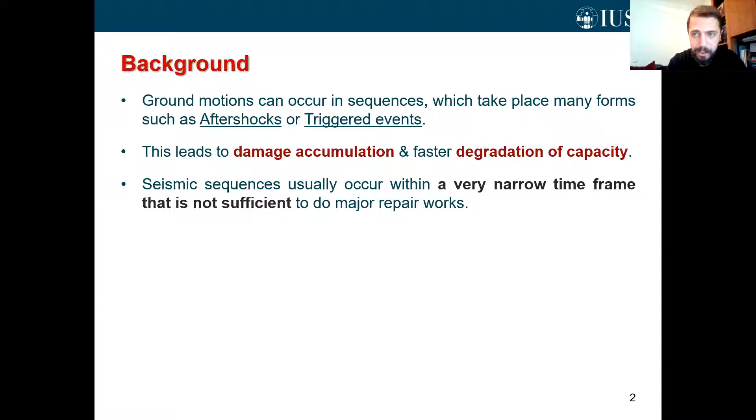On top of that, seismic sequences usually occur within a very narrow time frame that is not sufficient to do major repair works in case you have a damaged building population. This unfortunately can lead to catastrophic consequences, as demonstrated by many past events.

In general, the effects of ground motion sequences on buildings have attracted a lot of research effort in the past decades, but studies available in the literature pertaining to the assessment of fragility and particularly vulnerability using refined nonlinear models are still very few.

In this study, we try to fill this research gap by investigating the effects of ground motion sequences on the performance of case study reinforced concrete frames.

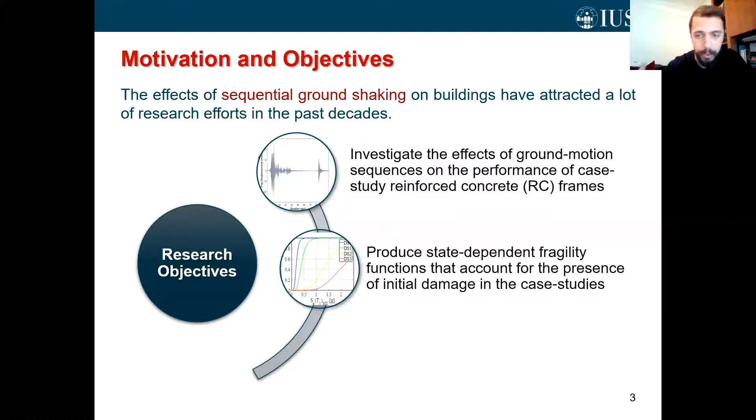We also try to produce what we call state-dependent fragility functions that account for the presence of initial damage in our case study frames. Finally, we endeavor to develop vulnerability functions both in 2D and 3D forms that can be easily adopted in seismic risk assessment and quantification of direct seismic losses applications.

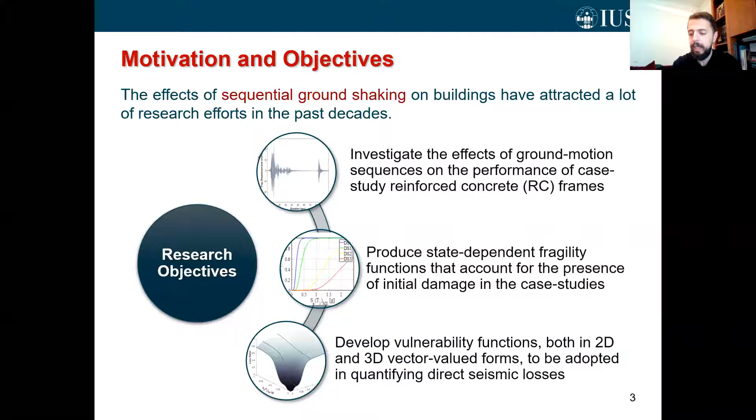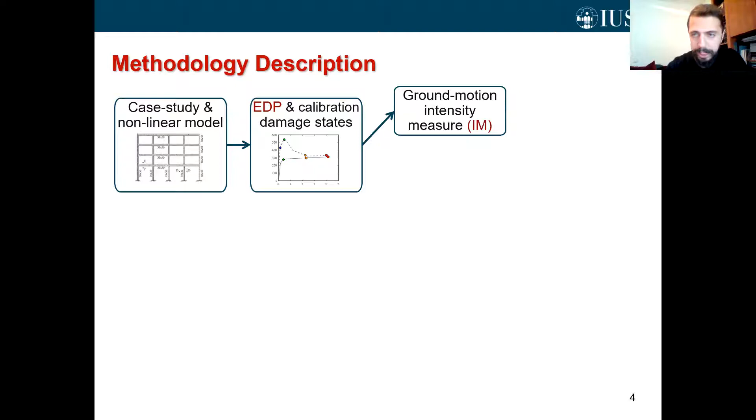The methodological framework we followed starts by identifying the case study buildings and developing the relevant nonlinear models. After that, we select an appropriate engineering demand parameter to quantify the damage, and we calibrate what we call the damage states. Next, we select an appropriate measure for ground shaking intensity, and we define the ground motion sequences, because after that we perform nonlinear time history analysis.

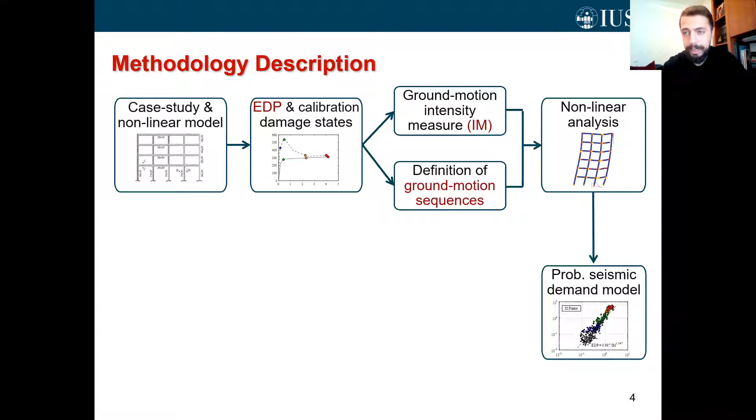Then we use the analysis results to fit a probabilistic seismic demand model that can be used later to derive the state-dependent fragility curves. After that, we can go from the fragility curves to what we call vulnerability functions, which can be expressed in the form of 2D curves or even 3D surfaces, as will be explained at the end of this presentation.

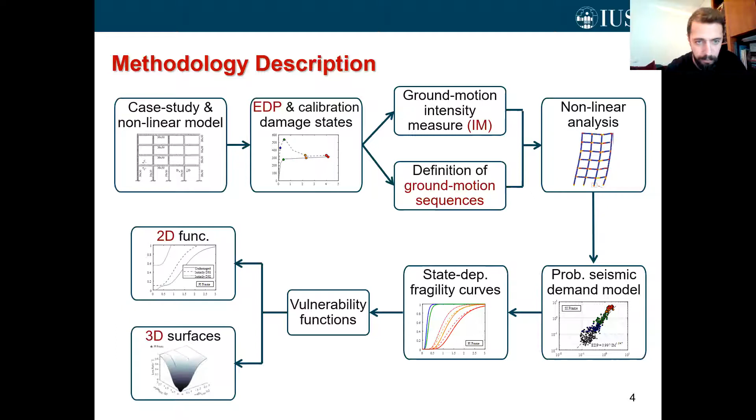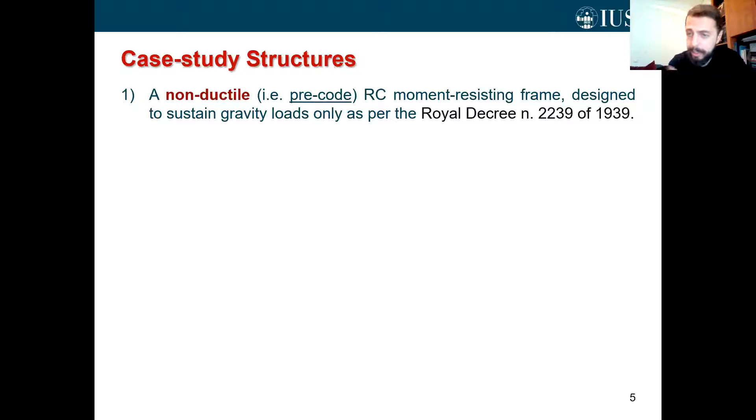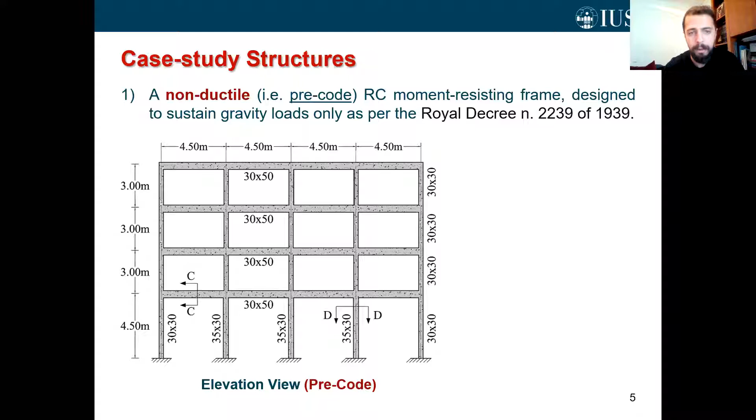Let's start by defining the case study buildings. First, we considered a non-ductile pre-code moment-resisting frame made of reinforced concrete, designed only to sustain gravity loads in accordance with the Royal Decree in Italy of 1939. Here you can see an elevation view of the frame, which consists of 4 floors and has a uniform bay length of 4.5 meters. Here you can see a cross-section for the beam and another cross-section for the column.

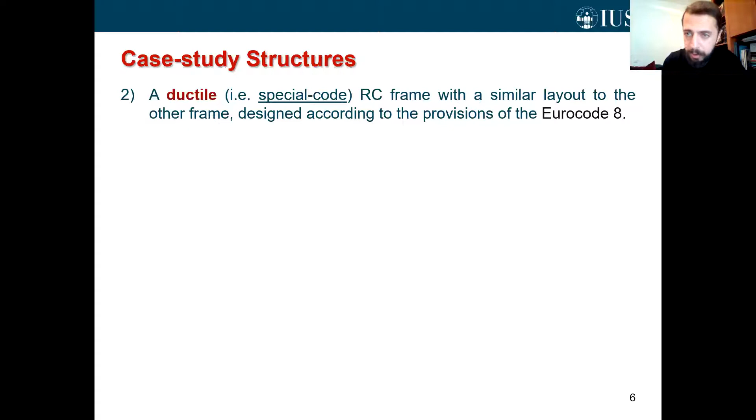Next, we considered a ductile special code moment-resisting frame that has a similar geometrical layout to the previous frame, but this time it has been designed according to the seismic provisions of Eurocode 8 for buildings with high ductility class. Here you can see an elevation view of the frame, together with a beam cross-section and a column cross-section.

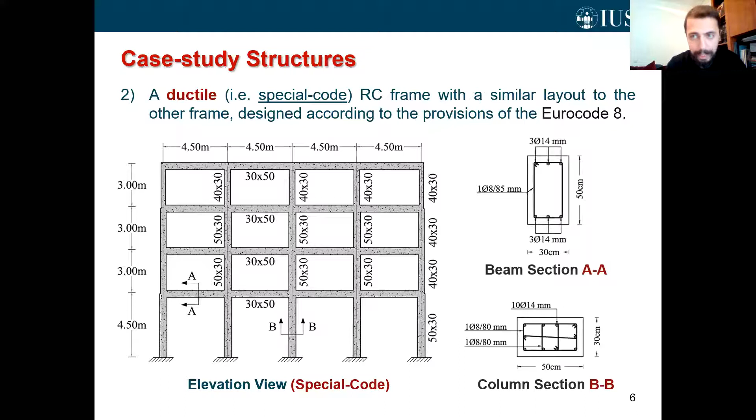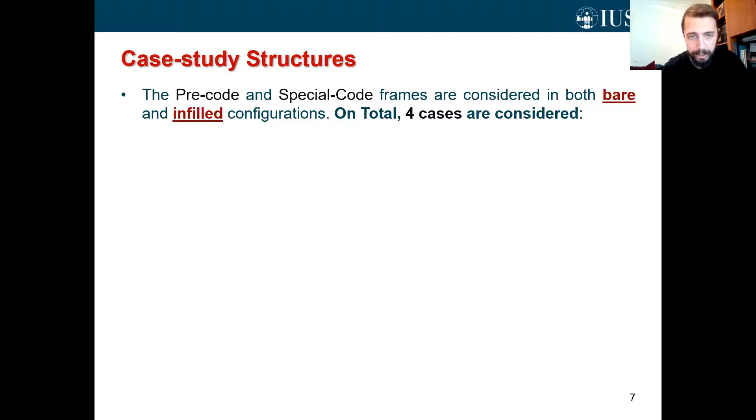I would like to add that we considered both the pre-code frame and the special code frame in both bare and infill configurations, which means that in total we have 4 different case studies: the special code bare frame, the special code infill frame, the pre-code bare frame, and finally the pre-code infilled frame.

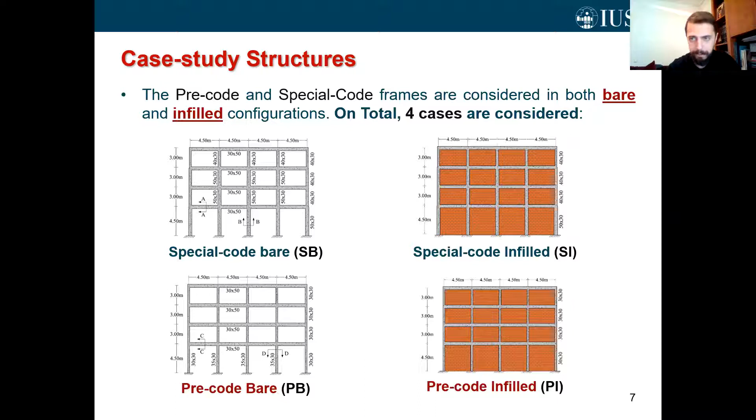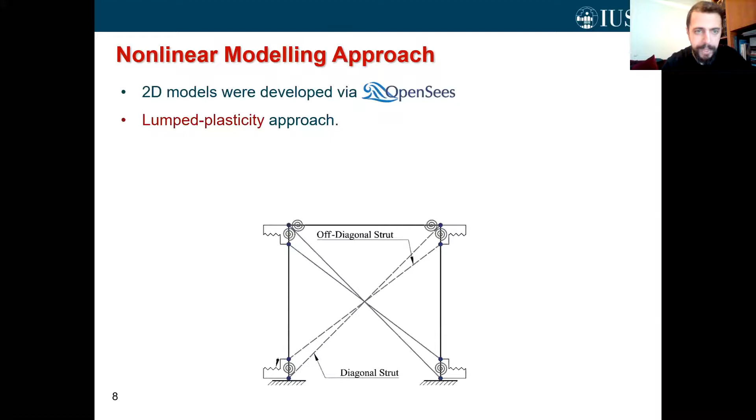Regarding the nonlinear modeling approach, we developed 2D nonlinear models using OpenSees software, and we also implemented the lumped plasticity approach, as you can see in the figure below. In order to account for the different modes of failure and different nonlinearities, we decided to model flexural and shear springs placed together in series, as shown on the right-hand side of the figure. We also accounted for the presence of infills using the concept of equivalent struts, shown on the left-hand side of the figure.

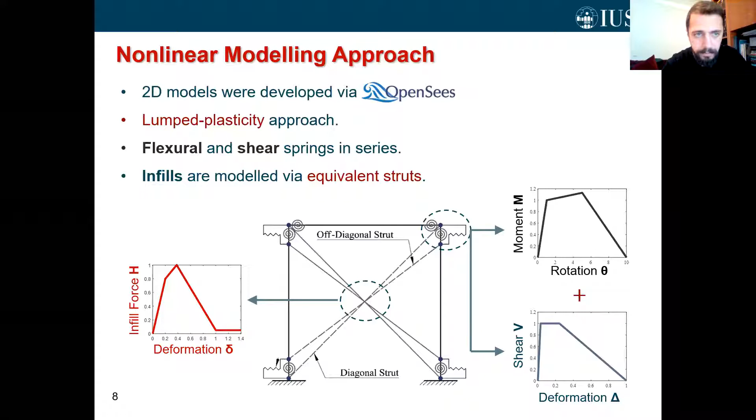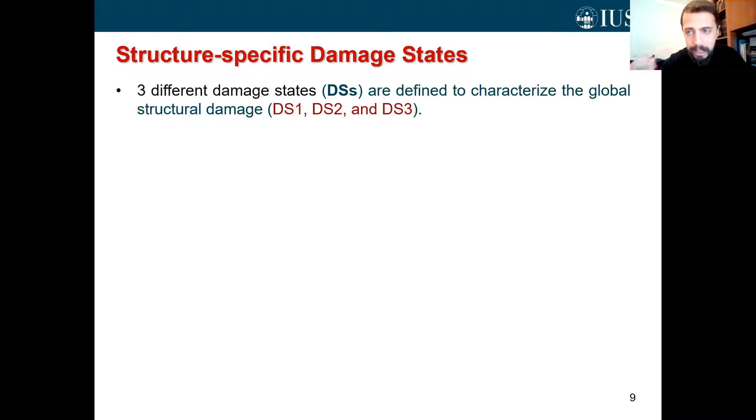In order to quantify the different damage levels that my structure can experience during an earthquake, we defined 3 different levels of damage, called damage states. The first is damage state 1, representing slight damage; damage state 2, representing extensive damage; and damage state 3, representing the near collapse state, which is the most severe one.

After that, to numerically quantify this damage, we decided to use the maximum interstory drift ratio as the main engineering demand parameter, because it has been proven to be highly correlated with structural and non-structural damage. Based on that, the next step is calibrating the maximum interstory drift ratio thresholds corresponding to the occurrence of each damage state.

Without going into too much detail, this can simply be done by running pushover analysis and then performing local assessment of multiple measurable criteria in order to spot the exact occurrence of each damage state in terms of drift thresholds. On the left-hand side, you can see the special code frames with their pushover curves together with the damage state thresholds, and on the right side, the same parameters for the pre-code frames.

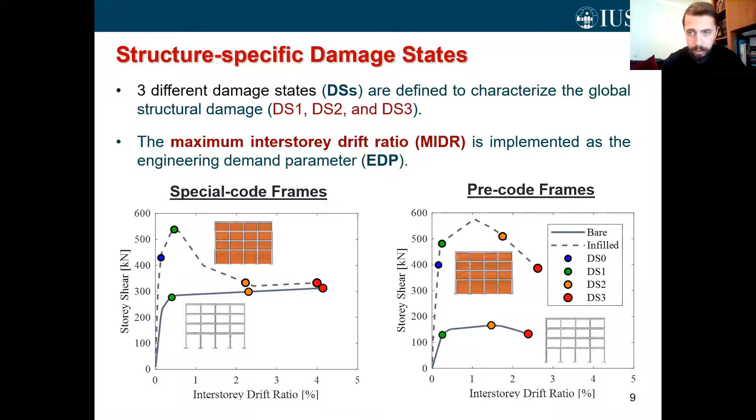Let's talk now about the selection of ground motion sequences. First of all, I'd like to highlight that we selected the average spectral acceleration as a measure for the intensity level of ground shaking for all the ground motions that we have.

Regarding the sequences approach, we implemented what we call artificial ground motion sequences. According to this concept, the main shock records are used as both main shocks and aftershocks. In order to minimize the bias associated with this approach, it's always preferable to select the main shocks randomly in order to be seeded as aftershocks.

I know many people might argue that using real sequences, consisting of real main shocks and real aftershocks, might be better to assess the response. But the main problem is that aftershocks with high levels of intensity are quite scarce, which means there might be problems in terms of statistical stability of the fragility curves. Therefore, for our research, it's always preferable to implement artificial sequences in order to assess the response and derive fragility functions.

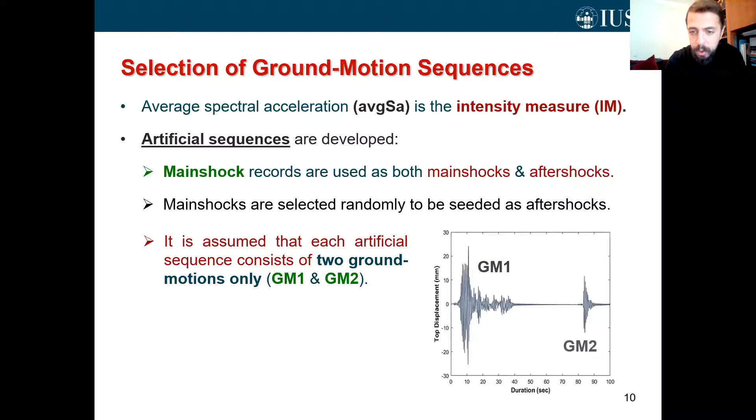In any case, we assume each artificial sequence consists of 2 ground motions. The first is called GM1, and the second is called GM2, as you can see in this figure.

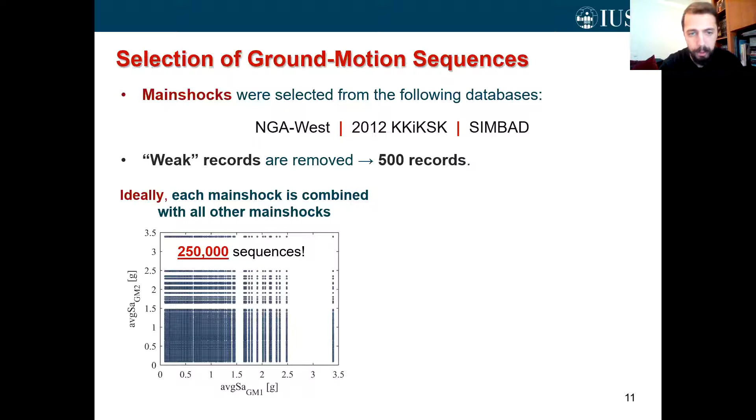In the ideal case scenario, if I'm interested in forming artificial sequences, I'm supposed to combine each main shock record with all the rest of the main shocks, as shown in this figure. On the x-axis, you see the intensity level of ground motion 1, and on the y-axis, the intensity level of ground motion 2 for each sequence. But if I implemented this ideal scenario, I would end up having 250,000 ground motion sequences, which is computationally expensive.

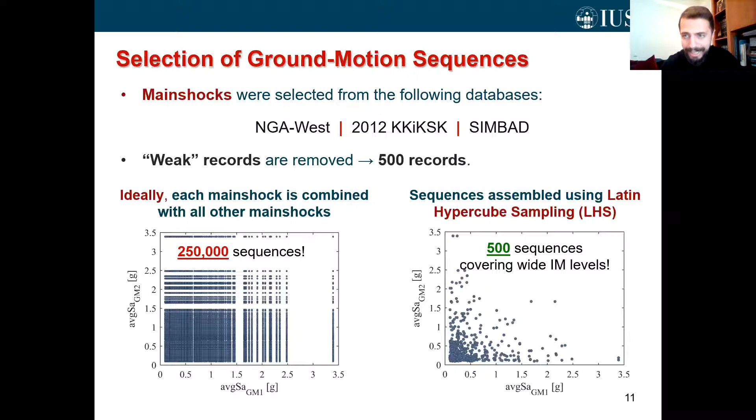And therefore, in order to reduce the number of selected sequences in an unbiased way, we decided to randomly assemble those sequences using the Latin hypercube sampling approach. We ended up having only 500 ground motion sequences that, as you can see, cover a wide range of intensity levels, and of course will require much less computational effort.

Let's begin now the discussion about the analysis. Our analysis is divided into two stages. Stage one has to do with the buildings in the undamaged state, so they are initially as-built without any initial damage. In that stage, the models are subjected to ground motion one only, in order to assess their performance in the undamaged conditions.

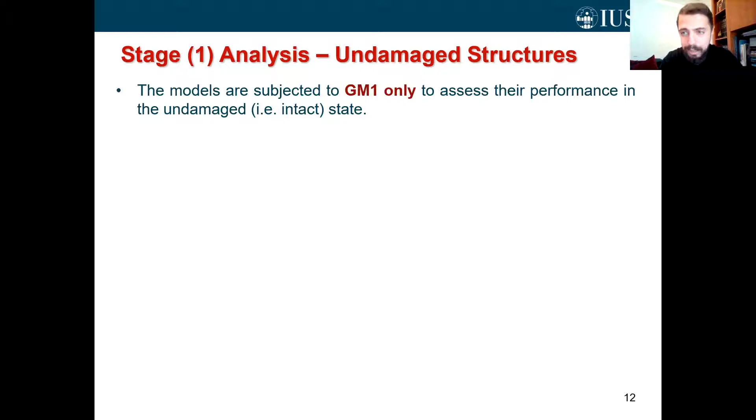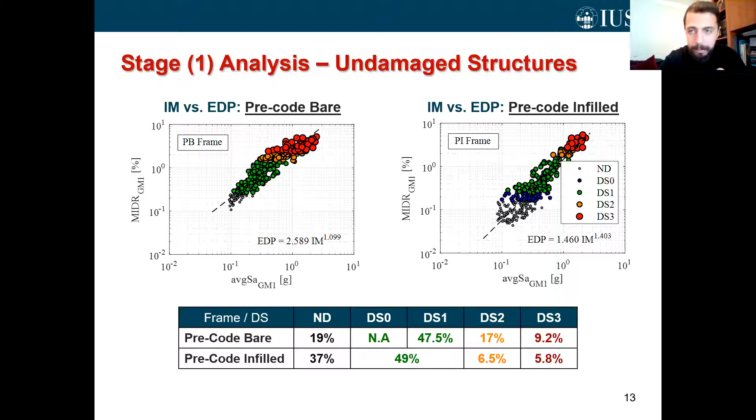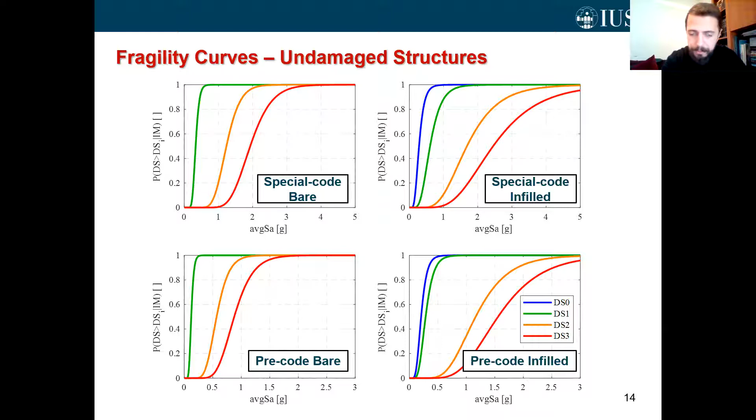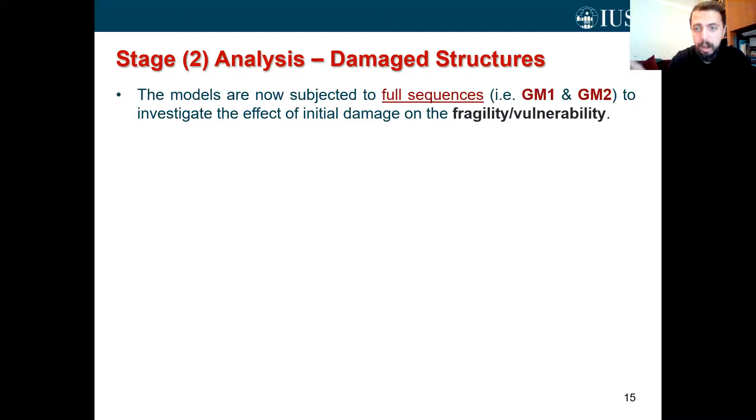Let's move now to the most important stage, stage number 2, which has to do with the damaged buildings. In that stage, the models will be subjected to the full sequences that include both ground motion 1 and ground motion 2, in order to investigate the effect of the initial damage caused by ground motion 1 on the vulnerability and fragility of the case study frames.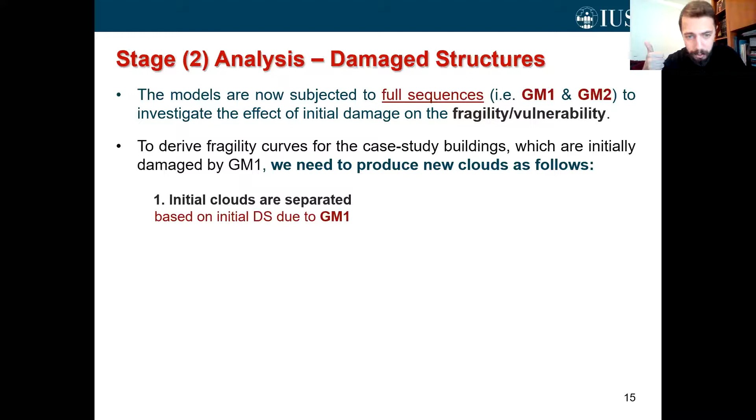Now, to be able to derive the fragility curves for the case study buildings which are initially damaged by ground motion 1, we have to produce new clouds as per the following steps. First, we have to separate the clouds resulting from stage 1 analysis based on the initial damage state caused by ground motion 1. Let's say I have this cloud resulting from stage 1 of the analysis, and this is from the SB frame.

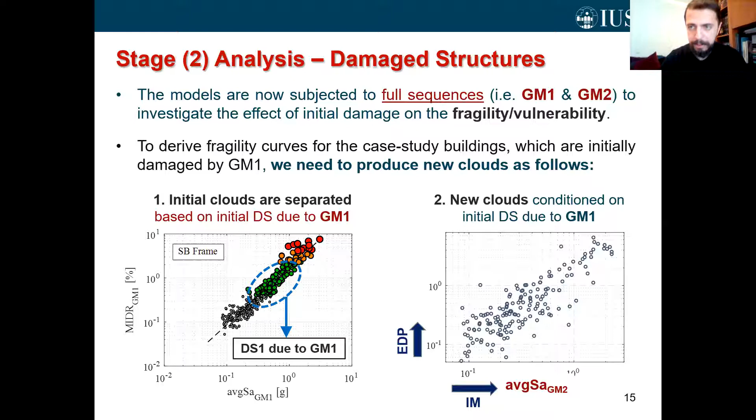For instance, I can go to the green cases that represent damage state 1 caused by ground motion 1, and take them and plot them in a brand new cloud, as you can see in the following figure. But we have to pay attention that this time the intensity level will be the average SA of ground motion 2 rather than ground motion 1, and the engineering demand parameter will be the maximum interstory drift ratio resulting from ground motion 2 rather than ground motion 1.

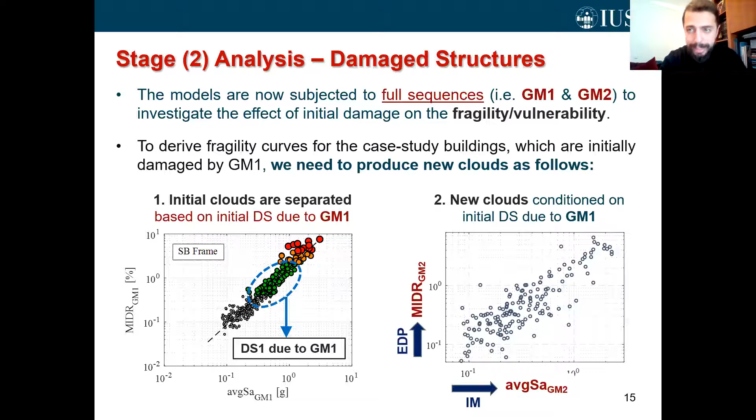In this case, I will be able to produce new clouds that are conditional on the initial damage state caused by ground motion 1, and I can use them to derive the state-dependent fragility functions.

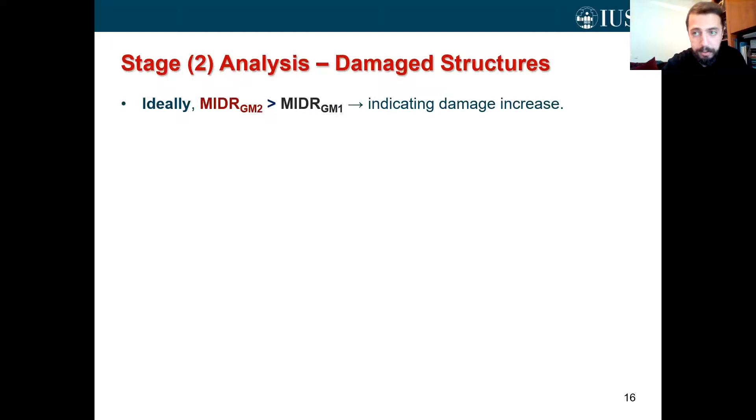But please pay attention here that, in the ideal case scenario, the maximum interstory drift ratio resulting from ground motion 2 is supposed to be higher than that resulting from ground motion 1, in order to have an indicator that there is a damage increase.

But the main problem here is that the maximum interstory drift ratio is only a peak parameter that does not explicitly measure damage accumulation during seismic sequences. Based on that, many analysis cases showed an opposite observation, meaning that the maximum interstory drift ratio resulting from ground motion 2 is less than that given by ground motion 1.

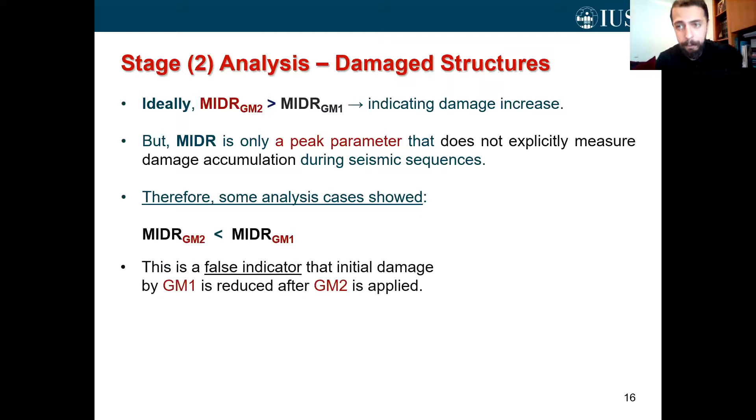This represents a false indicator that the damage level achieved during ground motion 1 will be reduced after we apply ground motion 2, which physically doesn't make any sense, because whenever you apply a new ground motion to your structure, you're supposed to get an increased level of damage, even if that increase is a little bit.

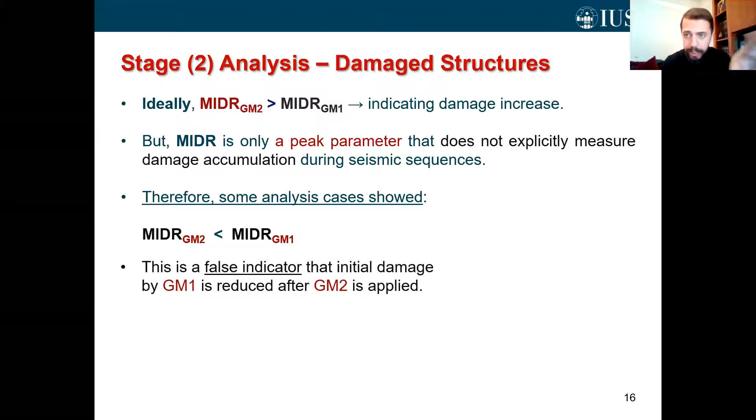And if we use those analysis cases in the fragility derivation, we might encounter what we call the crossing of the fragility curves. Again, this crossing gives us a false indicator that the buildings which have initial damage due to ground motion 1 are actually less fragile than the buildings that have no initial damage at all, which doesn't make sense, as we all understand.

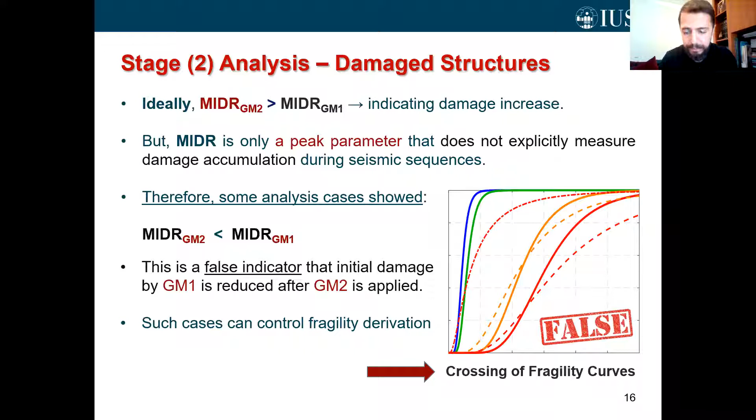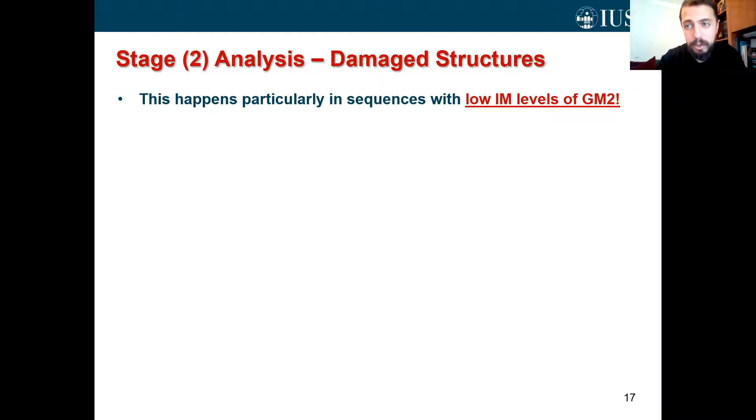However, we interestingly noticed that those analysis cases with the false indicators happen only in the sequences characterized by low levels of intensity for ground motion 2. According to that, we decided it's more appropriate to use bilinear probabilistic seismic demand models rather than the classic linear ones. Why is that?

Because simply they are more representative for the physics of the problem. Basically, they allow us to account for two different trends in the structural response: one for cases characterized with low intensity levels and another for cases characterized with high intensity levels.

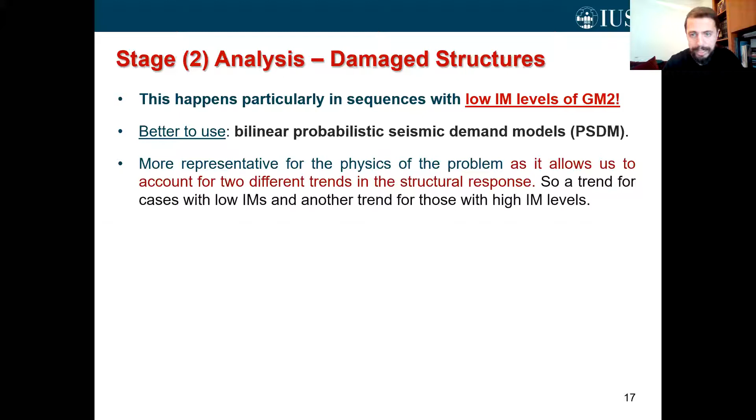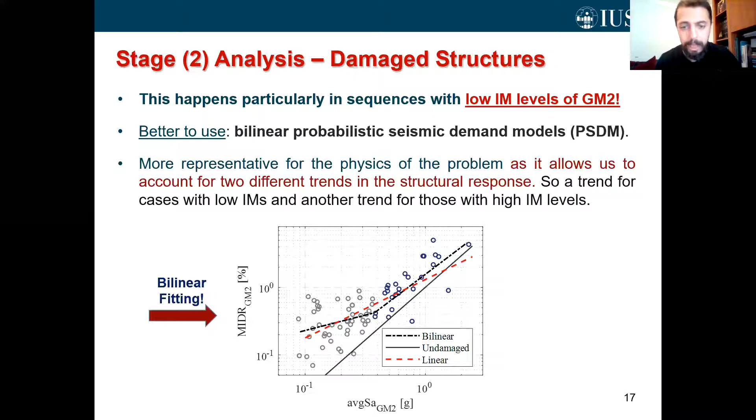However, if we use the bilinear probabilistic seismic demand model, shown here as a dashed black line, we account for the performance and structural response in a better way by capturing the two different trends, while avoiding the problem of crossings. Therefore, we were able to derive the state-dependent fragility curves, as shown in these figures.

The continuous line represents the fragility curves for buildings that are undamaged at all in their original conditions. The dashed lines and dashed-dotted lines represent the fragility curves for buildings initially damaged by ground motion 1. We can see the fragility curves shift to the left whenever there is initial damage, which clearly indicates that initial damage increases the fragility of the buildings.

To give a sense of numbers, when structures were initially in damage state 1, the fragility increases between 10% to 20%. When structures are initially in damage state 2, the fragility increases between 31% to 42%, which is significantly more considerable. This is clear evidence that more initial damage makes structures become more and more fragile accordingly.

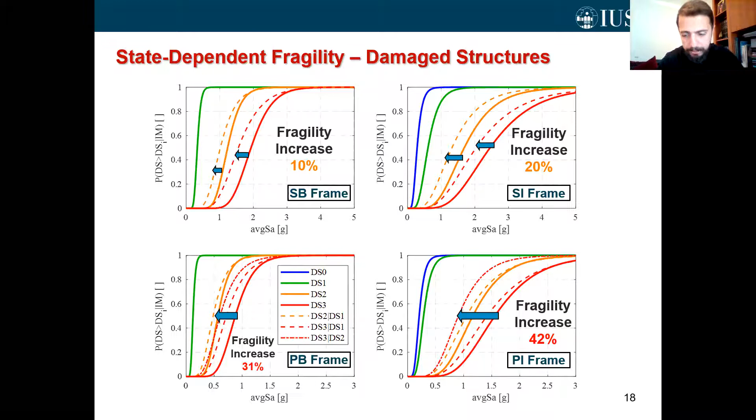The final step is the derivation of the vulnerability functions, done by combining the fragility curves discussed earlier with the so-called damage-to-loss ratios using the total probability theorem. For this study, we used properly calibrated damage-to-loss ratios based on studies of macro-seismic damage observations, as shown in the following table.

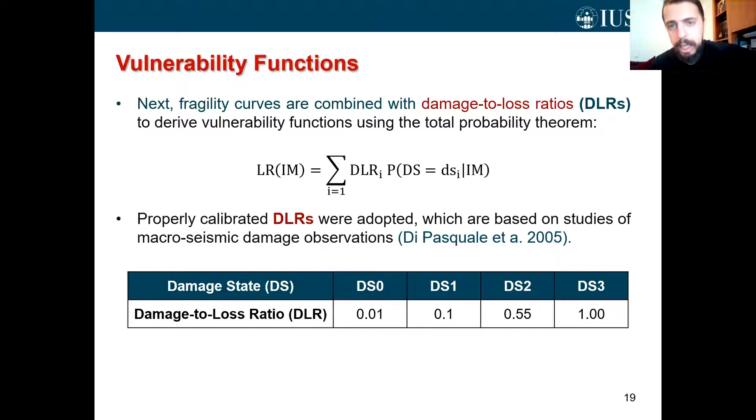Accordingly, we derived the vulnerability functions that provide the expected seismic losses given the intensity level of the ground motions. The continuous lines represent the vulnerability or loss functions for buildings in their original conditions without initial damage. The dashed lines and dotted lines represent the vulnerability functions when buildings have initial damage due to ground motion 1.

Notice the big difference in terms of losses for each single value of intensity level, because whenever there is initial damage due to ground motion 1, the expected seismic losses will increase drastically in case another ground motion hits the structure.

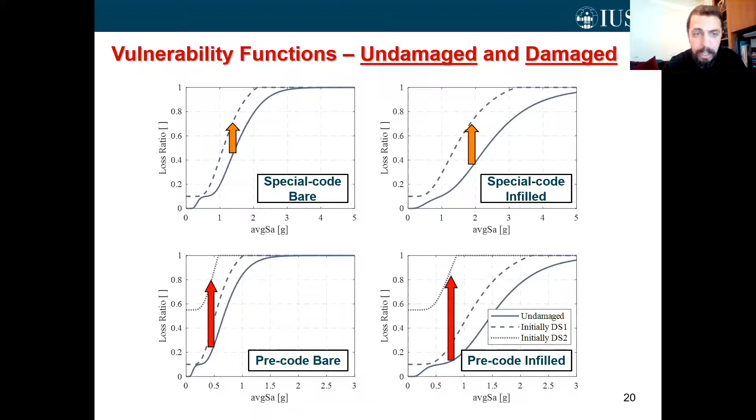So all we need is the intensity level of the first ground motion to estimate an initial loss ratio, and the intensity level of a second ground motion to estimate the new loss ratio, which will be greater due to the presence of additional damage. These surfaces can be easily implemented in seismic risk exercises and applications because they help us quickly and effectively estimate the additional losses caused by ground motion sequences rather than a single ground motion.

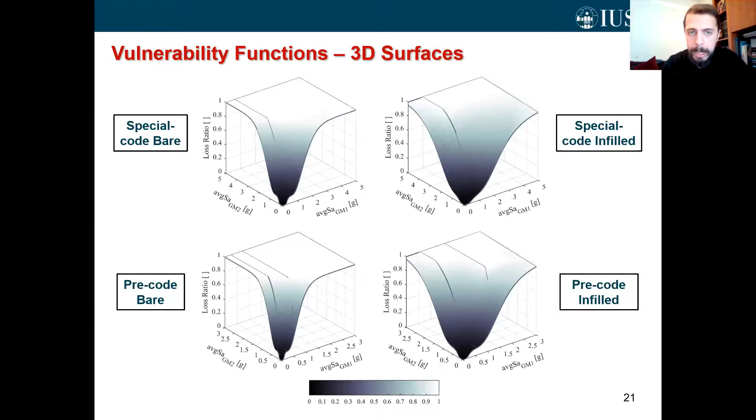We observed that the presence of initial damage due to ground motion 1 will definitely increase the fragility and vulnerability of the case study frames. Also, when the initial damage state is higher, the increase in fragility and vulnerability becomes very significant. Finally, we observed that special code frames are significantly less susceptible to ground motion sequence damages, unlike the pre-code frames.

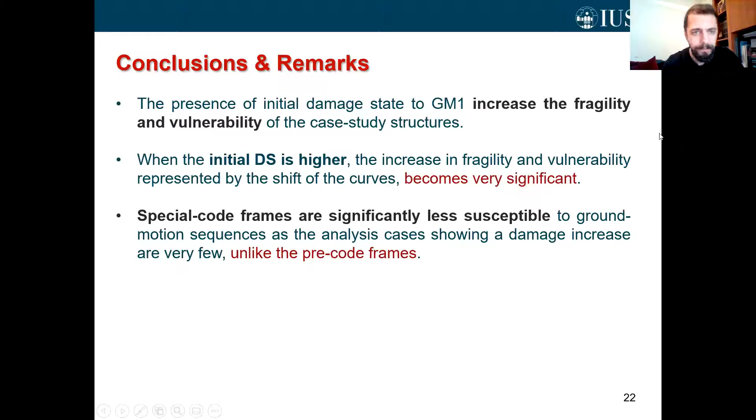Yes, perfect. Thanks very much for this invitation and opportunity to Arash and EPICentre. I will try to address the same issue Karim was addressing using drift, but this time using hysteretic energy.

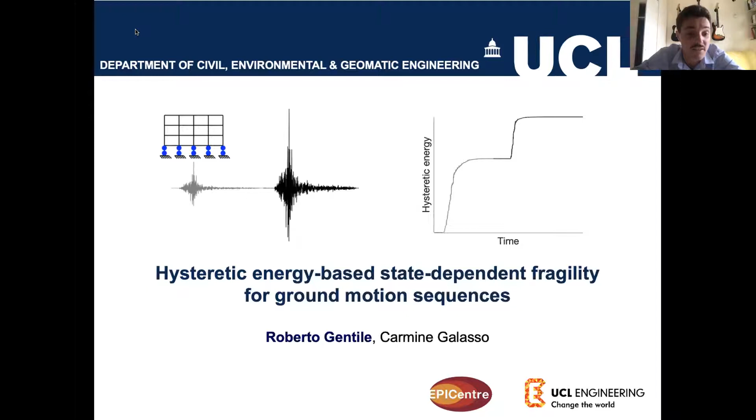We discussed why we like peak quantities like drift when we derive fragility. This is because we have many experimental tests based on drift that allow us to compute the demand and capacity of our members and structures with reliability. However, whenever we have low cycle fatigue in our problem, we might lose some power from these peak quantities.

For example, whenever we have long duration ground motions, very soft soils, or ground motion sequences, which I will now call main shock after shock, but in reality are ground motion 1, ground motion 2, as Carmine has discussed. So whenever we use drift for main shock after shock, unless we do some tricks like the bilinear probabilistic seismic demand model, as Carmine said, we might have crossings, which are statistical inconsistencies of our fragility model. I will try to address this using dynamic hysteretic energy, which always increases.

So you will never have a decrease of energy between aftershock and main shock. But we have a few challenges that we have to discuss first.

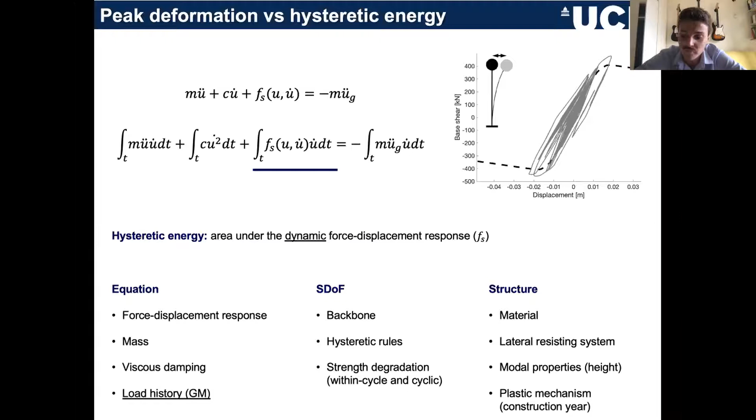So let's consider a realistic frame. This is a concrete frame, four stories, four bays, and this is a newly designed one. So you have plastic hinges everywhere at all stories and plastic hinges in the columns at the ground.

However, whenever you calculate the cloud analysis only considering the main shock, on the left you have the maximum interstory drift versus the hysteretic energy in the main shock, and you see that this data fits the power law relationship that we always use.

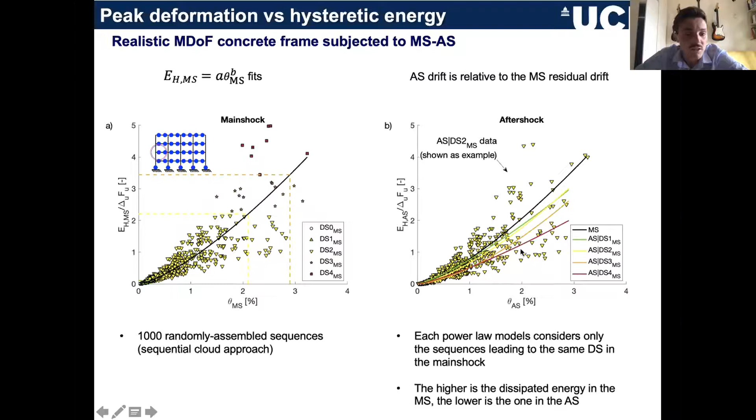This property will be very, very useful in building our probabilistic seismic demand model, which is a surface in this case, representing the hysteretic energy cumulative on the main shock and aftershock. This will depend on the maximum interstory drift in the main shock and an intensity measure of the aftershock. In this case, the intensity measure is average SA.

What I require from this model is that it must be consistent with the mechanics of main shock aftershock sequences. So this is basically considering that the hysteretic energy must be monotonically increasing. I can never decrease my total dissipated energy by going from the main shock to the aftershock.

This is somehow trivial. Then I want the aftershock hysteretic energy to be decreasing with the maximum interstory drift achieved in the main shock. It's exactly what we said before: the more I dissipate, the less I can dissipate.

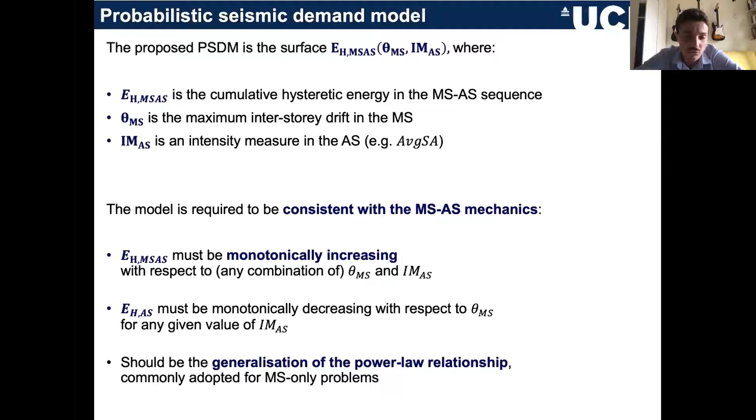Then I also want the model to be a generalization of the common power law relationship that we use for single clouds, so that if I derive fragility functions of the main shock only from this model, I should get the same result as with the normal power law approach.

So let's decompose the issue into main shock first and aftershock later. First of all, we've seen that before: I can fit for the main shock only a power law relationship, the blue curve there, using the main shock only data, drift versus energy, that derives the median response of the main shock energy. And I can derive the A and B parameters over there via linear regression.

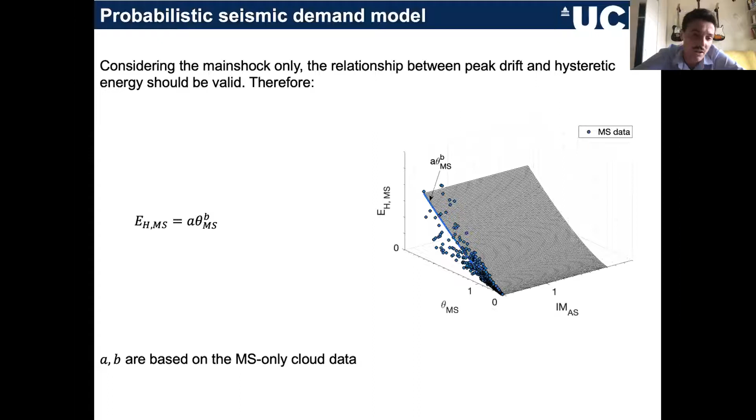That's a trivial part. For the aftershock part, we need a consideration first, which seems complicated but in reality is trivial. Imagine you have a main shock producing zero drift, zero maximum drift, which means there is no main shock. Then you attach to this ideal main shock an aftershock.

Whatever you have, and you call it aftershock, is in reality the main shock. So to put it another way, an aftershock that follows a main shock producing zero drift is the main shock itself. Why all this?

Because by using this consideration, I can use the main shock data in this plot over here, the gray dots, by considering that for drift equal to zero, main shock drift equal to zero, I have this plane over here. I can use the main shock data even though in my model I am considering the intensity measure of the aftershock due to this consideration.

So I can fit the black power law model between the intensity measure and the hysteretic energy using the main shock only data, and I will get two parameters via linear regression, which are C0 and D.

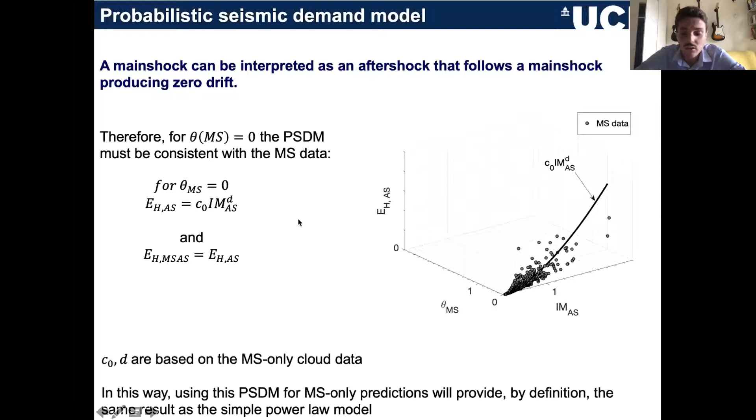Then I, of course, need to consider that the overall slope of my power law model needs to go down the higher the main shock drift is.

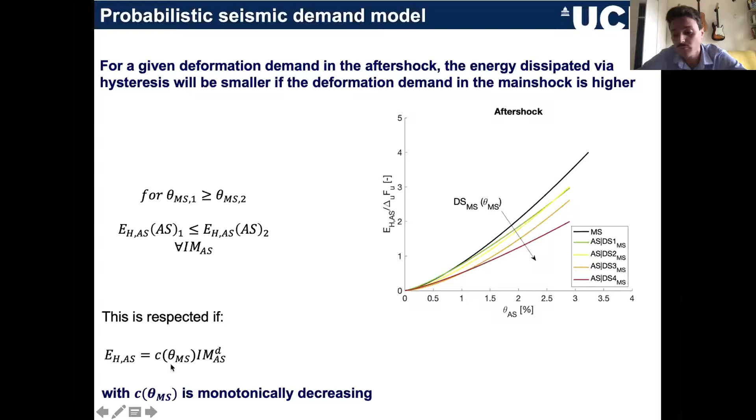So one way of doing it is to have a coefficient C that depends on the drift in the main shock. The easiest way of doing it is to have a linear damping factor, which is simply 1 minus a parameter m times the drift, that multiplies the old C0 that we already had.

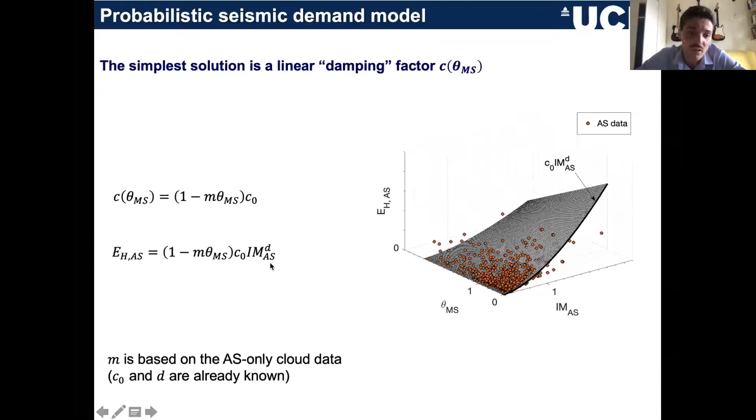This might be a bit confusing, so I will try to recap for a second. I'm dividing up the energy into two parts, the main shock and the aftershock one.

First of all, I will use the main shock only data, drift versus energy, to estimate the parameters A and B very easily to get this power law, the blue power law.

Then I will use again the main shock only data, so the intensity versus the energy to estimate C0 and D, so I can estimate the power law in black over here. Then I will estimate the parameter M that reduces the slope of this power law as the drift in the main shock increases.

This is done with nonlinear regression based on the red dots over here, which are the triplets of maximum interstory drift in the main shock, intensity in the aftershock, and energy in the aftershock. I sum up those two surfaces and I get the final probabilistic seismic demand model that you see here. This gives me the median response of my structure in terms of energy.

So if I want a log normal fragility model, simply the median of the fragilities will be obtained by intersecting these surfaces. In particular, I want fragility functions that express the probability of exceeding some kind of damage state in the aftershock, conditioned on the pre-existing damage in the main shock.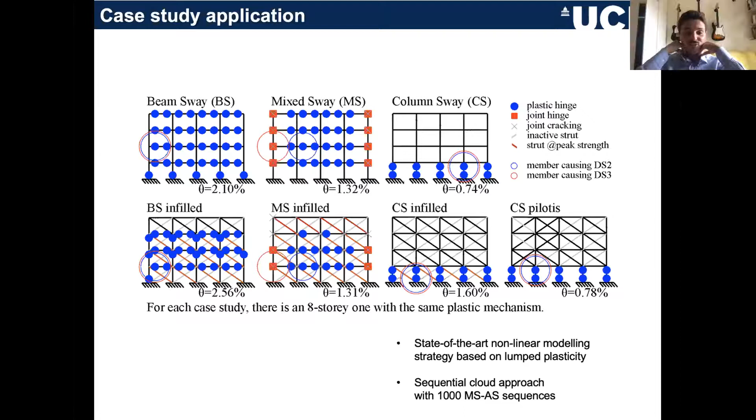One thing, the building that you used is different than the building that Karim modeled. Yes. So you can't compare the final fragilities out of it. No. Okay. Is there any plan of doing that as well to see how different methods work? You know, this is a good idea, but yes, we didn't think about it yet. But yeah, okay, thanks. I don't want to put more pressure or work for you guys.

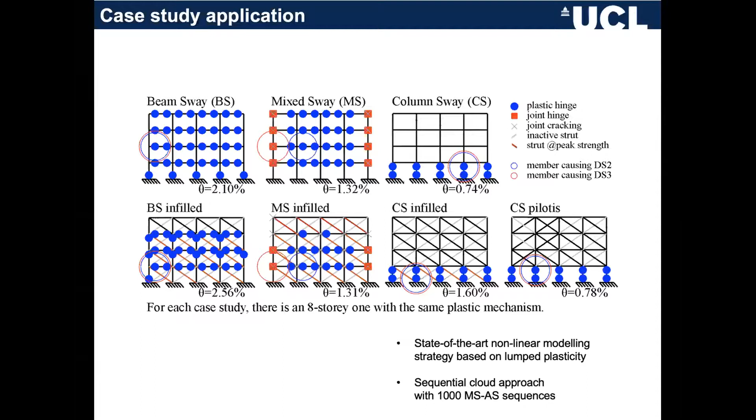One thing, the damage thresholds that you used before, like let's say the main shock and the aftershocks are the same, yes? You don't change the damage thresholds. Okay. And again, just one more question.

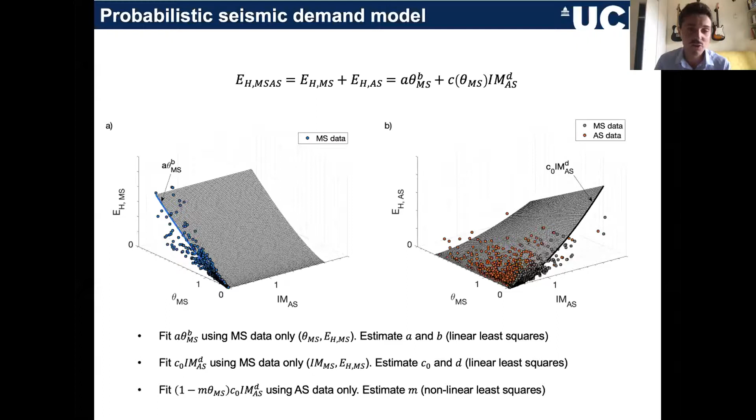How are you going on this, by considering that the damage state threshold do not change from the main shock to the aftershock? Is like saying low cycle fatigue catastrophic failure is not accounted for. So provided you don't have snap of rebars or whatever, something very catastrophic due to low cycle fatigue, your threshold is mechanically based, you can demonstrate it, they don't change. So exactly, if the building doesn't change, it should continue as like the definitions that we always have.

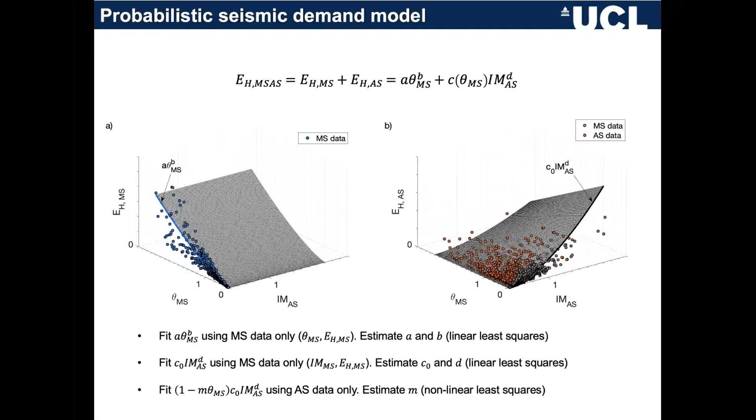One thing is, where do you see these fragility curves to be used? Are they like the case of the worst case scenario fragility curves, or should we get rid of all the fragility curves that we currently have, and say okay, there is always a chance of aftershock or another earthquake happening very close to our main shock,

and we stick with these new type of fragility curves? No, it turns out that for main shock only, the results of this model are very, very similar to whatever you can derive with drift. So you don't have to change whatever we did before.

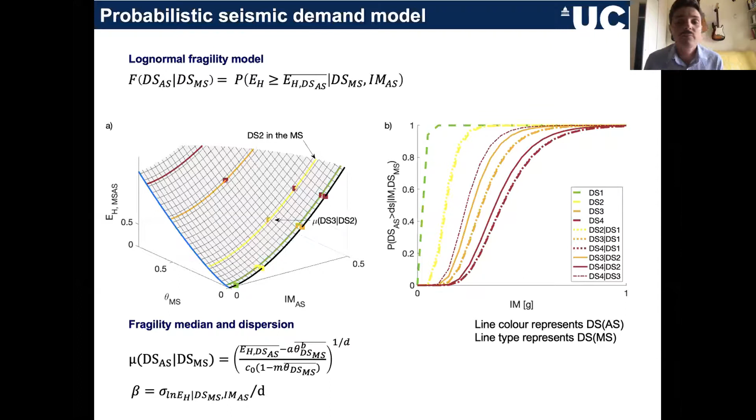Yeah, I mean the final outcome, the aftershock ones. Well, it depends. Exactly, so it depends, because there are cases in which you are more interested in damage accumulation. So, for example, for a new building, you basically don't care, and at least you can demonstrate you should not care. That's important. For very, very weak buildings, again, you will have very strong shifts, reduction in capacity, but your structure is likely to collapse anyway in the main shock, so you don't care.

In the middle, maybe you care, but to be honest, I didn't think about the specific application of this. It's more of a proof of concept first, simply because I'm not 100% sure of the thresholds, because, as I said, this is consistent. You convert drift to energy, but still we need validations with experimental tests. Yes, makes perfect sense.

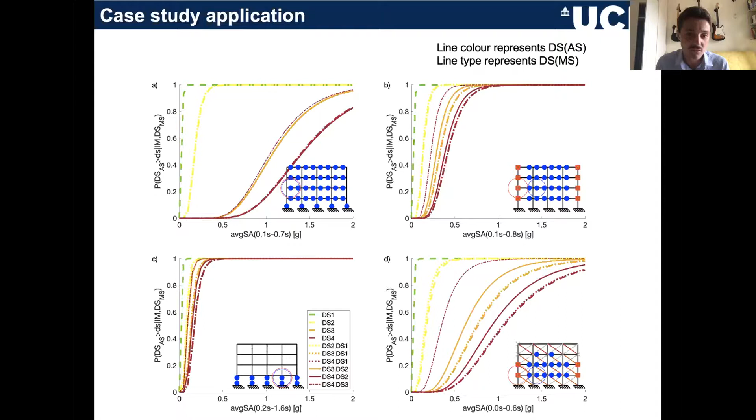Carmina, I can see that you have raised your hand if you want to unmute yourself. And thanks, Karim, Roberto, for this.

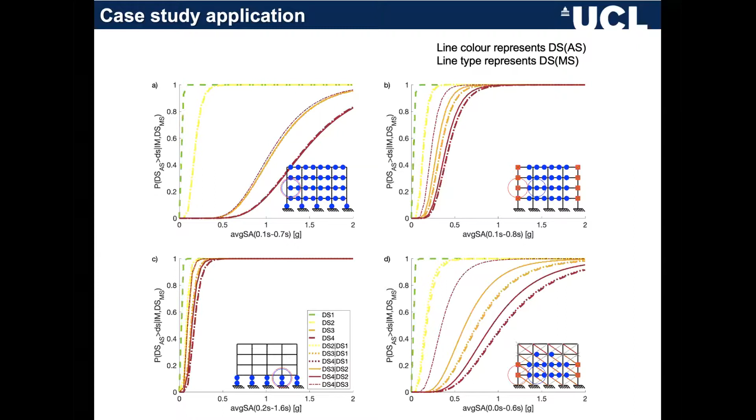I just want to make a comment on one point that Karim made about the ground motion selection, because I know Nevena is listening, and Karim said that he has selected artificial sequences, meaning simply pairing main shocks. Of course, you can do artificial sequences that are hazard consistent. So there is the recent approach by, for instance, Papadopoulos and Paolo Bazzurro, where they have developed some sort of target intensity measure for aftershock, given the target intensity measure for the main shock. And that, I would say, should be the preferred approach, especially if you are doing site-specific and building-specific applications.

So the motivating idea here is that we were looking mainly at regional type applications, for which you don't want to constrain your record selection to hazard consistent ground motions. Also, we were not really looking at aftershocks in a traditional sense. We were mainly interested in sequences, in particular triggered events, where ideally a fault triggers another event on a nearby fault through Coulomb stress transfer, without necessarily strong correlation, so you can consider them as two independent main shocks in the extreme case.

I think that's an important comment, because Karim was quick to say we use artificial sequences, simply pairing main shocks, fine. But there were motivations behind that, and if you are doing a site-specific application, of course, the best way is to do some hazard consistent selection. The Papadopoulos and Bazzurro approach is definitely the current state of the art in that regard.

Thanks. Yeah, because they simply provide artificial sequences, but they are representative of a potential scenario of sequential ground shaking. It's not that they are spectrally compatible. Yeah, thanks.

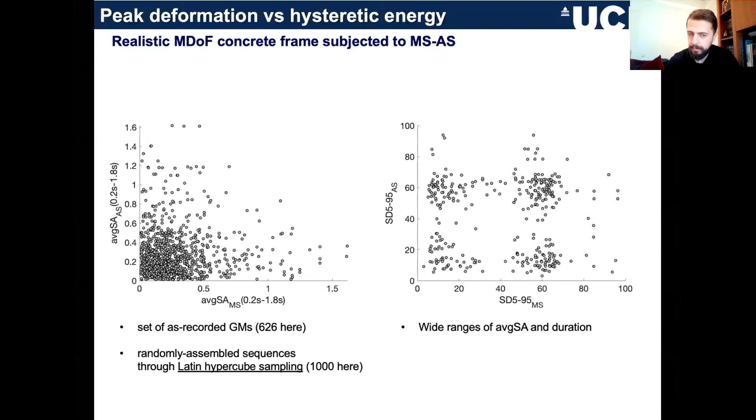Okay, anyone else has any question? You can raise your hand or type it in the chat. I can read it. Meanwhile, I have a question for Karim - it's not very much related to this aftershock, pre-shock, main shock discussion. How did you simulate the strength reduction of the infills, particularly in terms of shear?

Okay, so, because the model didn't show - the model was mainly on moment capacity, as far as I saw. No, let me show you. Can I share my screen quickly? Yes, yes, yes.

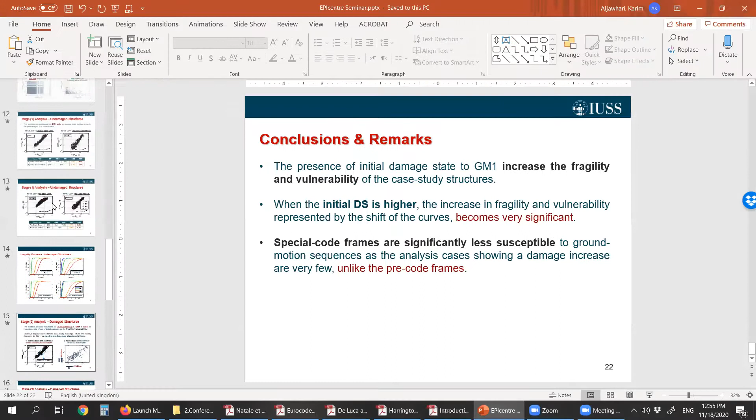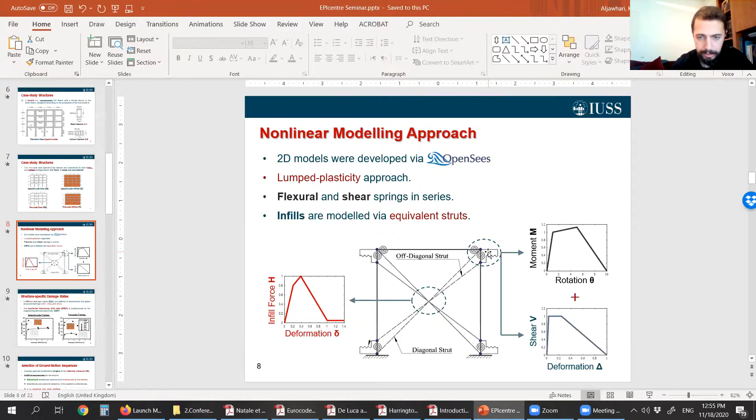As well as what happens if you have shear cracks in the frame itself, like in the middle of the column for example. Basically, the relationship that we use to define the backbone curve of the infills includes the degradation. It's the relationship developed by Liberatore and Decanini. Oh, if I just - you just saw the spring. Yes, yes, oh yeah, okay.

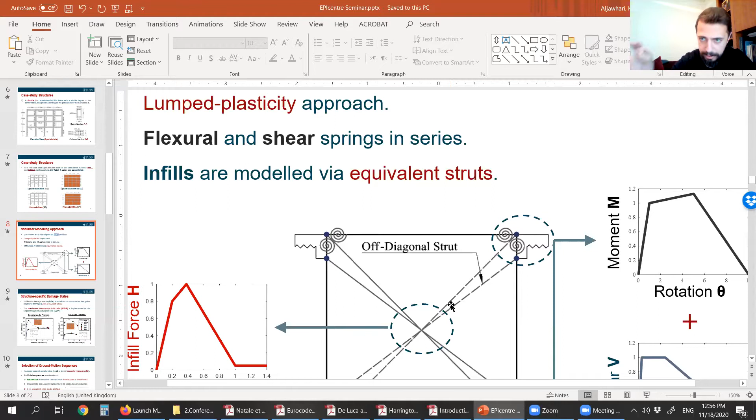So if you notice here, we have a diagonal strut and an off-diagonal strut. The diagonal strut is connected between the geometric joints of the frame, so it contributes to the global seismic behavior of the frame. The off-diagonal strut is connected directly to the spring, so if there's an increase of shear demand, it might trigger the shear spring failure, and in this case you'll have a sudden collapse in the frame you're analyzing. That shear failure will be in the frame members, like the columns and the beam - actually shear is not modeled in the beams, it's particularly in the column of that strut connected to the frame. So any shear failure or shear cracks inside the infill itself is kind of ignored.

The idea is you have to calculate different failure modes of the infill, and the most critical one will be the prevailing one you assume in the model. You cannot assume the infills will crack by different modes inside the model itself - you have to pick one. Based on the properties of the infills, you calculate the critical failure stress, like the tensile strain, tensile failure, shear failure, or compression of the diagonals - I don't remember their names actually - but you select the most critical one to construct the backbone curve relationship for the infills. In general, in your model, you assume that if your infills fail, they will have only one mode of failure, and it's in-plane, not out of plane.

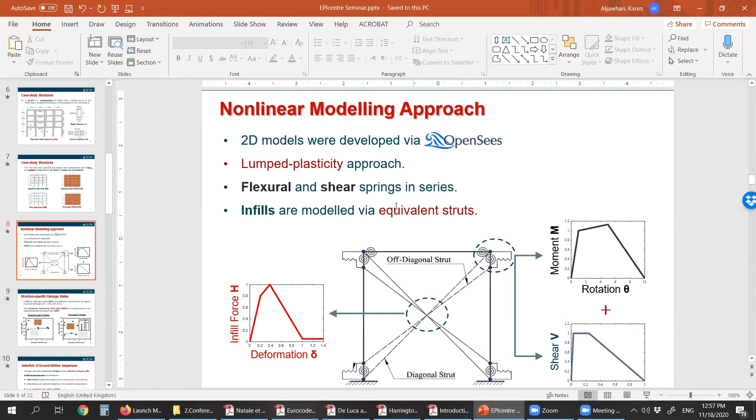Okay, again, if anyone has any questions - let me just check the hour. So if no one else has any questions, thank you very much for your presentation.